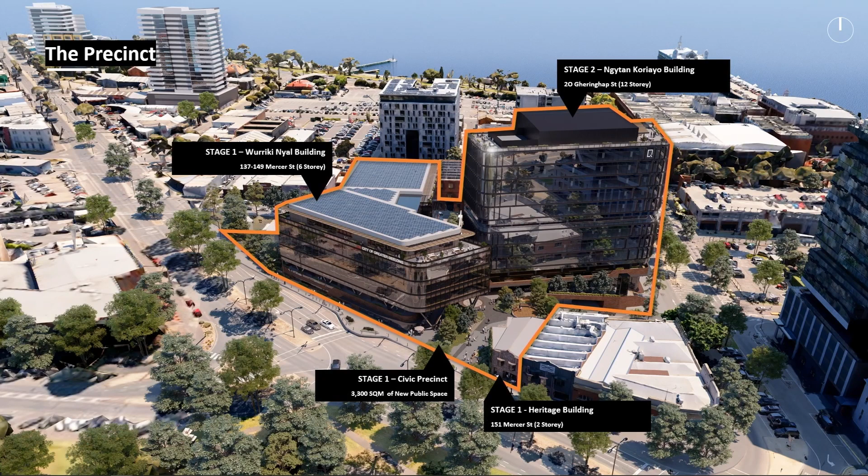The precinct is a collection of 3 buildings with public landscape in between. There's a heritage building, 2 stories, restored to its original footprint. We have the 6-storey Wurriki Nyal Council office building and the 12-storey commercial office building positioned to the north of the site, framing the precinct and addressing some taller, approved developments to the north.

The site is located in central Geelong, stitching the train station with the waterfront precinct to the north, the CBD and shopping precinct to the west, and the arts precinct to the south.

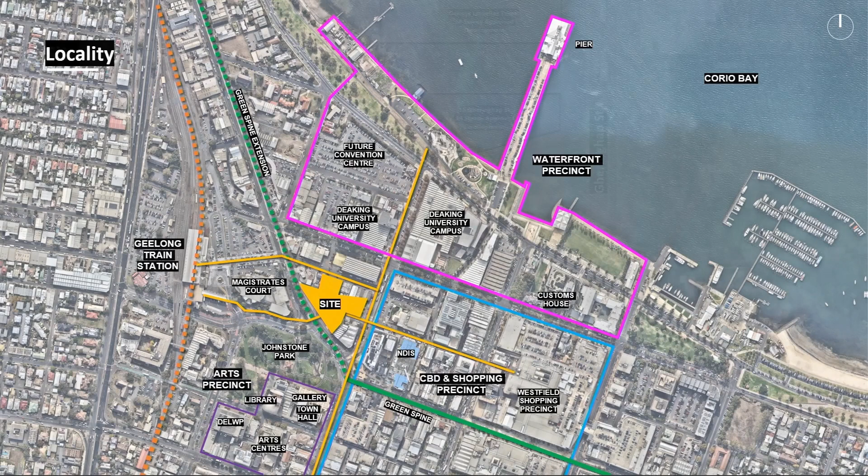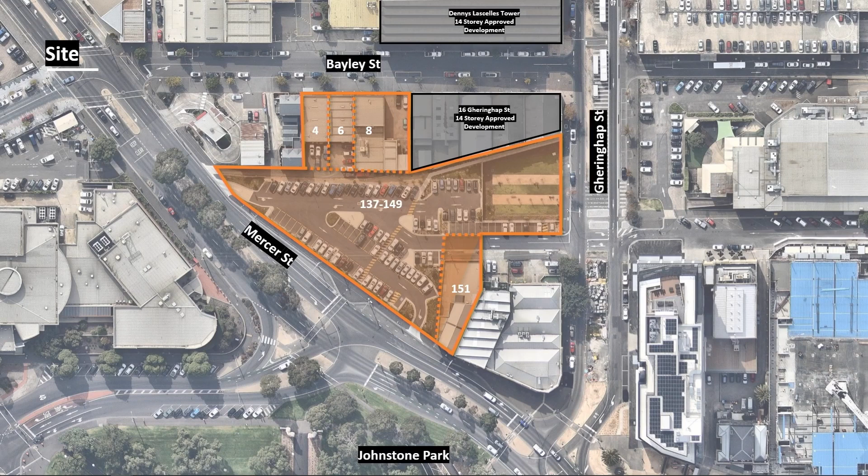The site has somewhat of an awkward geometry, both in plan and in section, with 137 to 149 the original competition site, with the developer going off and purchasing 4, 6 and 8, and 151 in order to create a north-south connection and increase the public land offering.

Geelong has a rich cultural heritage which drew inspiration for the design.

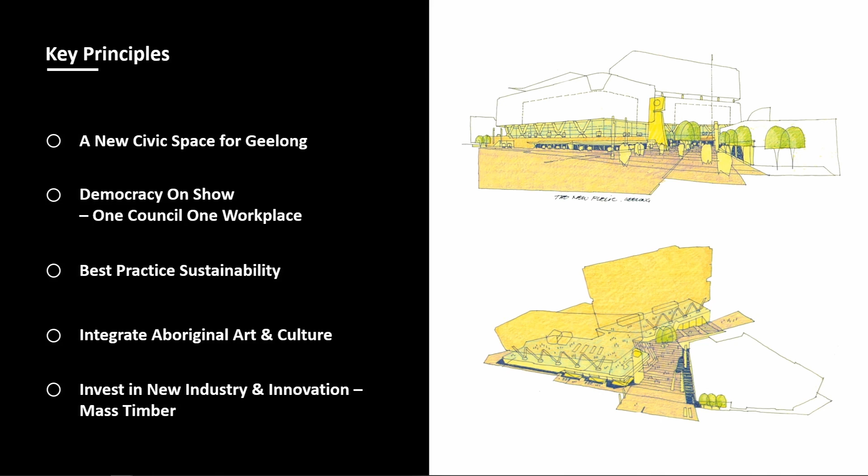5 key principles for the project: create a new civic space for Geelong, amalgamate 7 council offices into 1 workplace, exhibit best practice sustainability befitting Australia's only UNESCO City of Design, integrate Aboriginal art and culture, and invest in the new mass timber industry in Geelong.

The design idea is simple: establish a public platform accessible to all, activate that with a podium that hosts events, and then place the vibrant workplace on top.

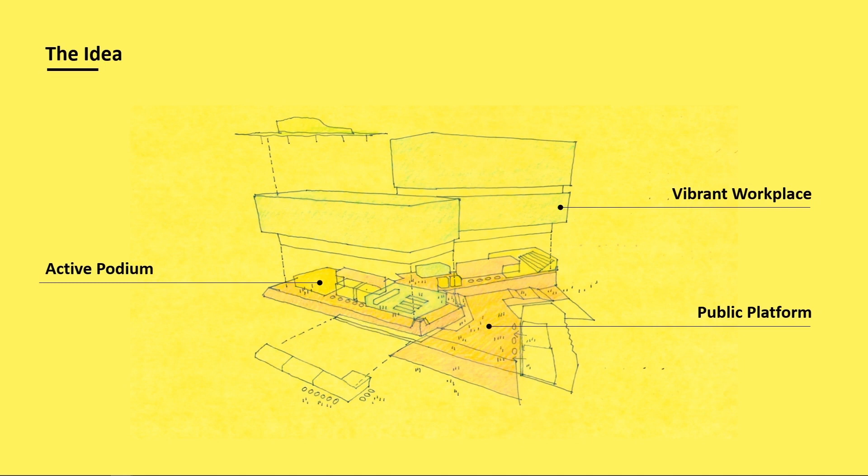Just to give you a bit of an update on the staged master plan: stage 1 is complete, which is 151 and the Wurriki Nyal building. We've got stage 2 starting in 2024, which is the 12-storey commercial building.

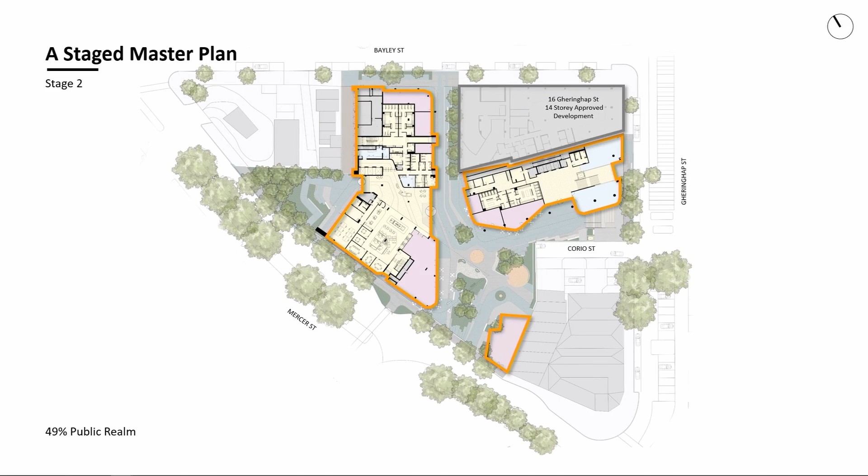But very much this is about a public realm and the stitching of various buildings together. We've created a new central hub through here as the Civic Heart, and we've addressed different building entrances off this Civic Heart.

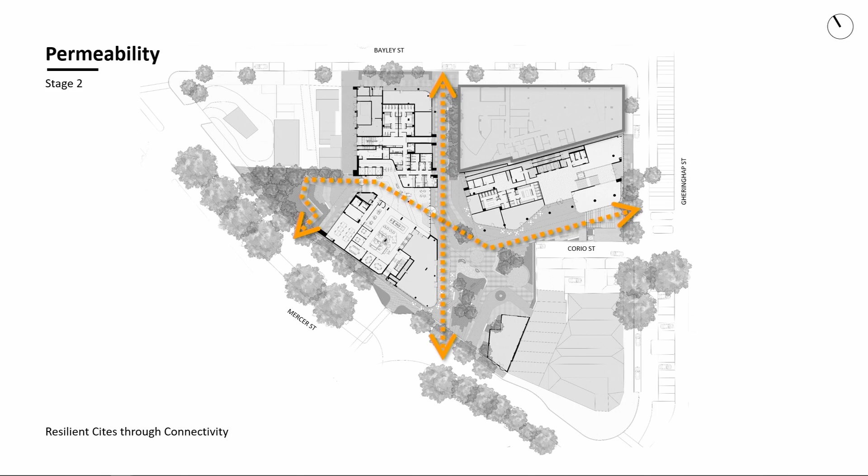Mercer Street's a very difficult frontage, it's got a lot of traffic through it. With our development opportunity, where we've acquired the site to the north to make our site bigger than the original competition brief, Bayley Street and Gheringhap Street are now thoroughfares and crossover lines. So we're encouraging people to move from the train station east-west through the site, and also north-south connecting Bayley Street.

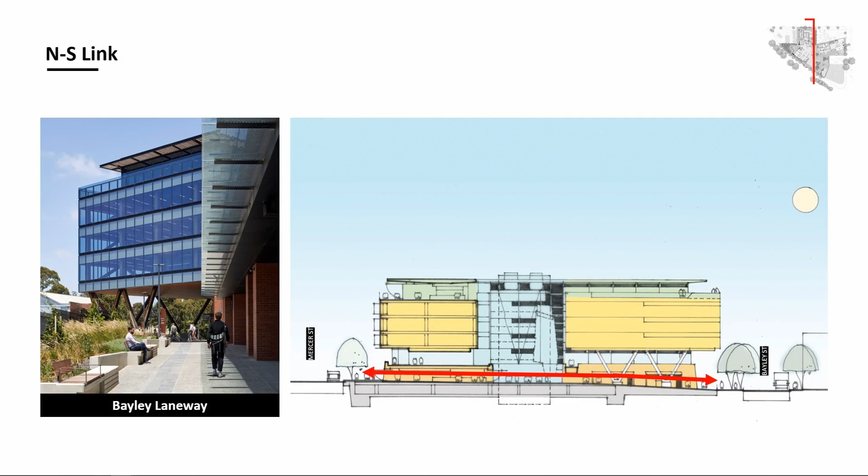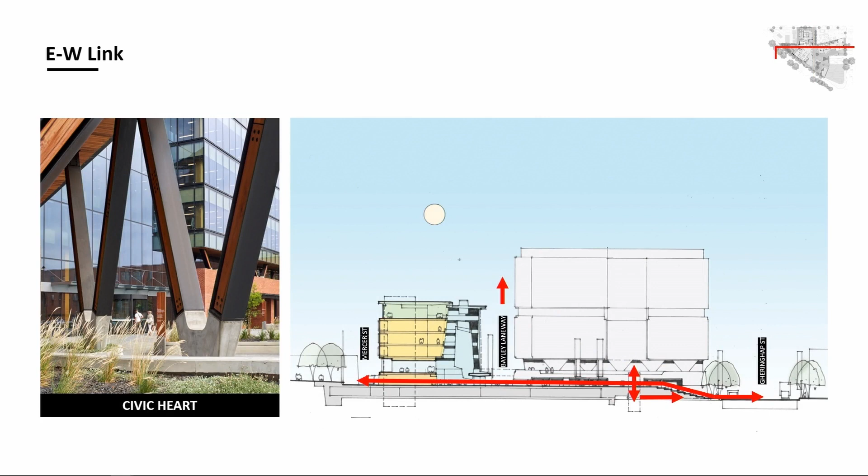Universal access was a big consideration here as well, ensuring that we are dealing with the land level changes. So we've got equitable access from Mercer Street all the way through to Bayley Street, and we also provide access from Mercer, or from the internal space, all the way through to Gheringhap Street via lift and stair connections.

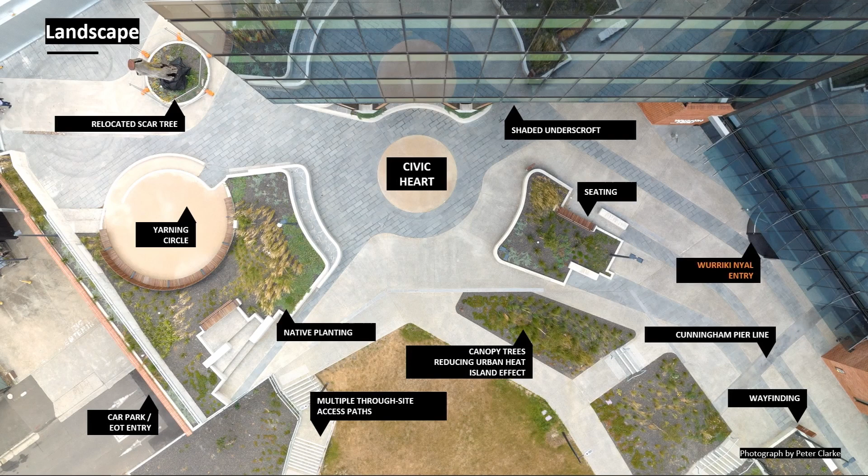Very much about this public realm and this new heart set in from Mercer Street, which is quite a busy road. We've integrated yarning circles, various native landscaping, seating, and shaded undercroft as well to provide respite from sun.

The Wurriki Nyal building is very much about a public ground plane, as Wesley said before, walking through the site, but encouraging people to walk through the building.

Level 1, our podium floor, is an invited public realm, so we've got multiple multi-purpose spaces there and meeting rooms. They're adaptable to change into different configurations.

So it's a 6-star Green Star building with excellent NABERS ratings for energy, water and waste. We have an array of ESD initiatives such as solar energy collection and rainwater collection, which is filtered through the building and the building's operation.

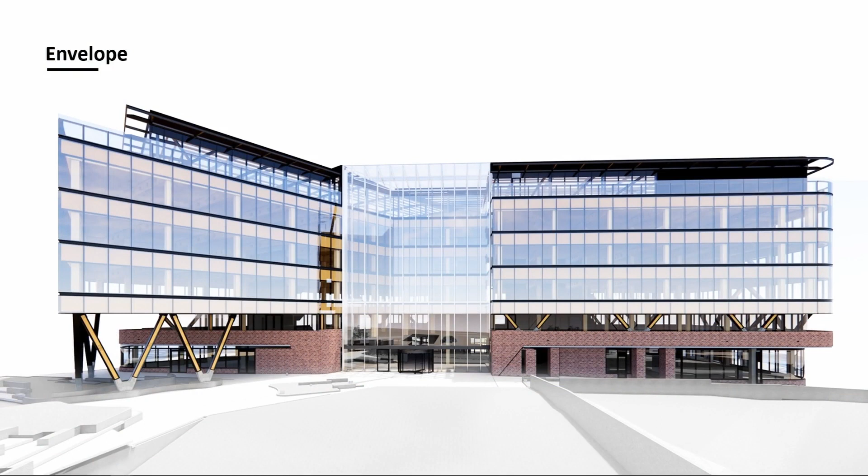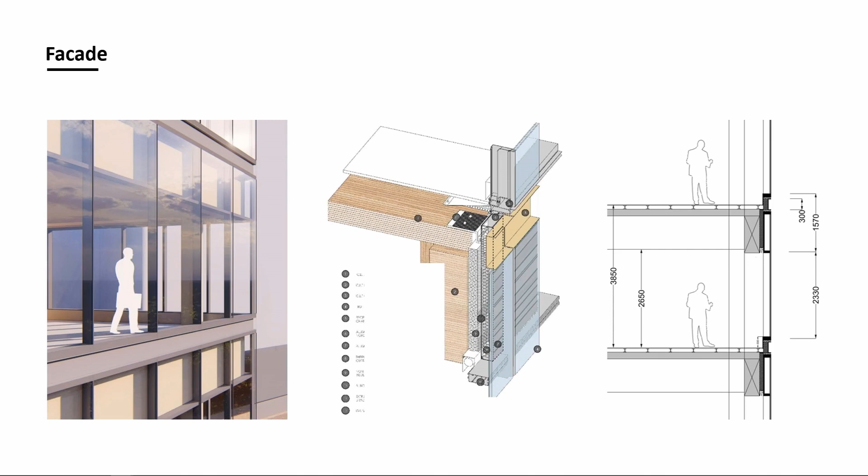The building's envelope on the ground floor uses brick masonry material referencing the brick heritage buildings of Geelong, with a high performance thermally broken double glazed facade running around the perimeter of the building for the office.

One of the key features is the hybrid structure of the building, with a concrete ground and podium, mass timber construction above, with a lightweight steel frame atop, which is not only a sustainable material but also allows us to save 32% of the embodied energy in hotspot materials of the project.

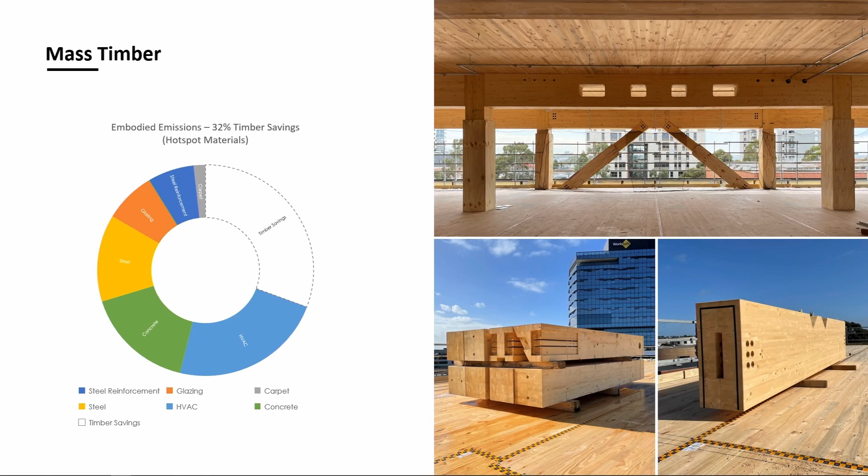And here we can see that skin being overlaid on the structure. We have a large flat roof area which allows for 25% of the electricity supply to the building.

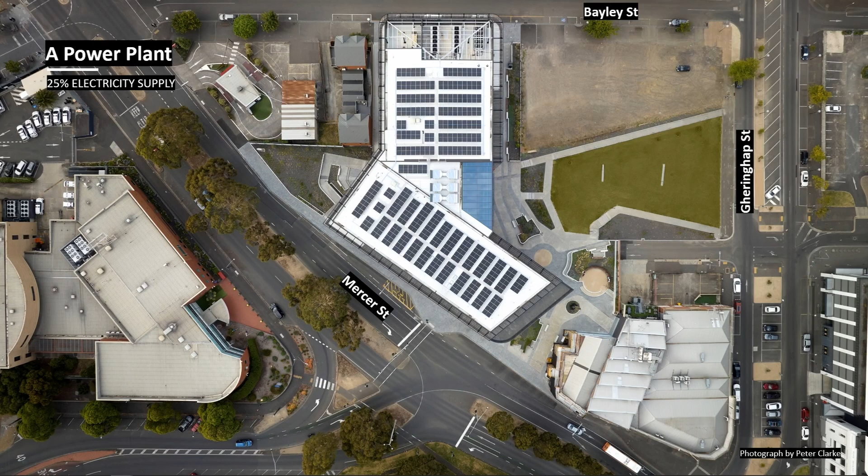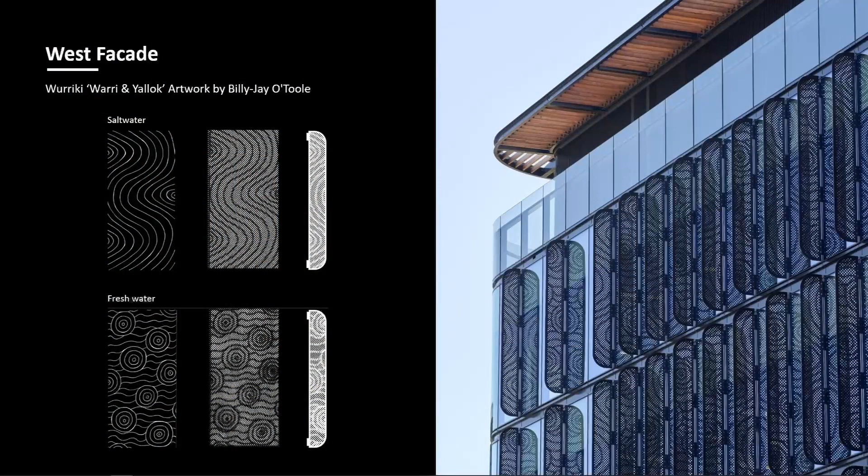One of the key features of the precinct is that it has 3 street frontages. We have the southeast Gheringhap Street entry, the southwest Mercer Street arrival point when you drive into Geelong, which features an Aboriginal artwork on the west facade of shade fins.

Then we have the northern Bayley Street entrance, which provides access to Bailey Laneway, creating a new street for the precinct. We have the Victorian Street, which gives you access to the civic heart, and then the main entry of Wurriki Nyal. Stepping inside, we've really tried to relate this back to Aboriginal culture and theming.

A lot of consultation has gone through with different elders and different groups, Wadawurrung. We themed the floors to be water, earth, mountain and sky. With their approval, we went through a whole colour selection with them as well. That relationship between ground, the external environment and the public space carries through as you transition up through the building.

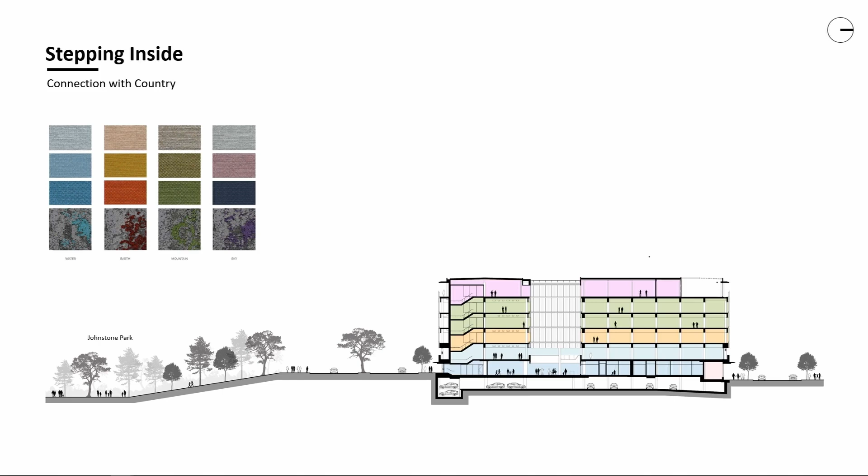We've got our basement private car park and end-of-trip facilities, which in Melbourne is standard nowadays, but in Geelong this is actually a new thing for them, encouraging that movement and walking to work and riding to work was a big thing and a big push.

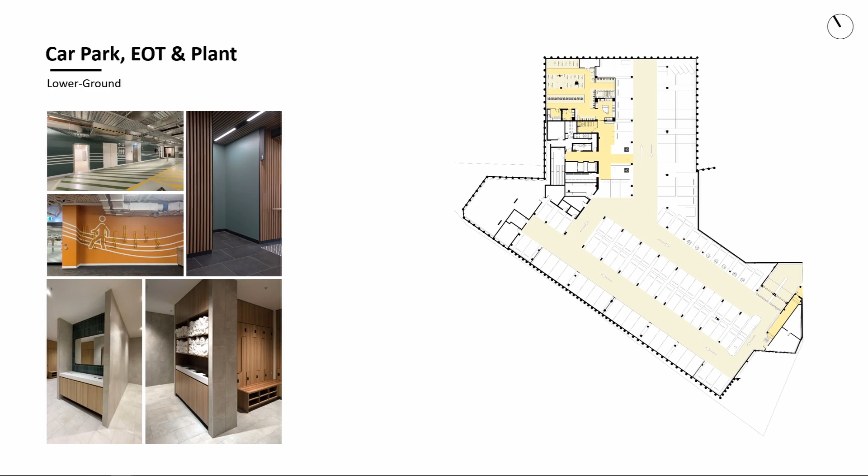Our public realm on the ground floor here is really the catalyst for this project. We see this building as the first in a series of buildings coming, and the idea is to really encourage and make use of it as a catalyst for further development.

The atrium space is an open arrival space. This is the front door to your customer service area. It's supposed to be welcoming, lively, and highly accessible and public to different people.

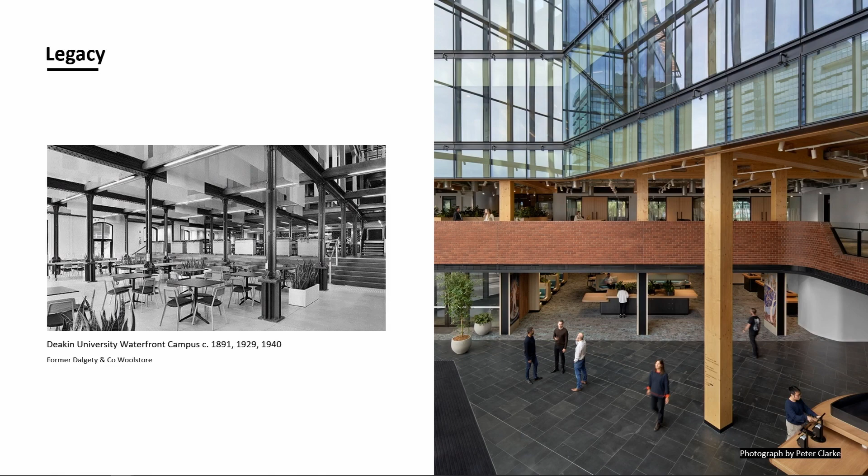The connection between podium and ground floor has been very important. So the podium floor here is our public realm, and customer service is on the ground floor.

I'm going to run out of time.

Front door to the commercial office tower. The invited public realm, flexible workspace is adaptable for council meetings, for presentations. This is community forum spaces as well.

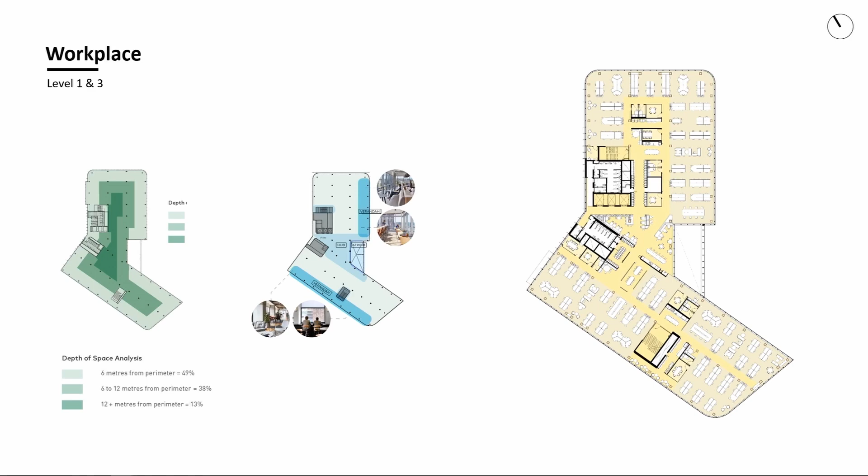As you start to work your way up through the building, you get into our workplace, which is that private domain for the staff. But the whole point is that they've got a safe workplace. If they ever come to meet the public, they go down to the ground floor into this podium space, which is that interaction zone.

A lot of effort went into dematerialisation, with the CLT on display. The connection to street, to public, across to Johnstone Park has actually been a very high consideration as well.

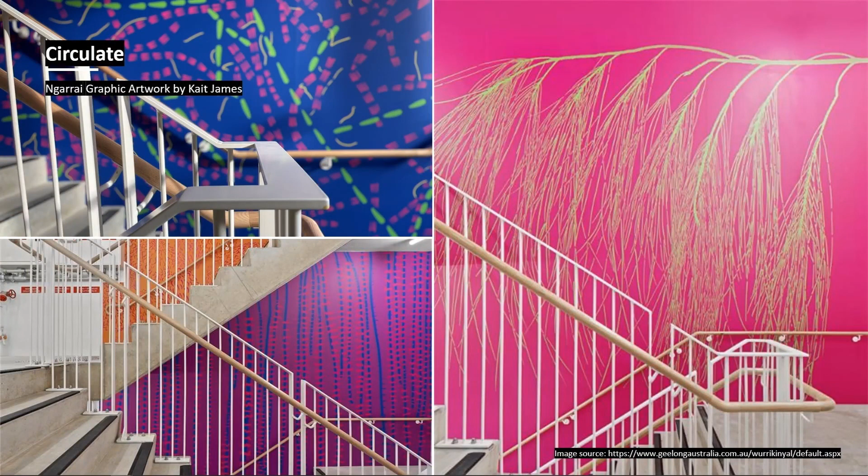And then the circulation spines, encouraging this local Indigenous artist to do graphics as you walk through the building, again a subtle representation back to country and connection to country as well.

Our top floor finishes with this lightweight steel structure, which is all on display again, and references to the timber CLT elsewhere just by some timber veneer panels.

And then we've got a roof terrace, which is the main hub space to the council office space with great views to the beach, to the waterfront at Johnstone Park. That's it, thanks.